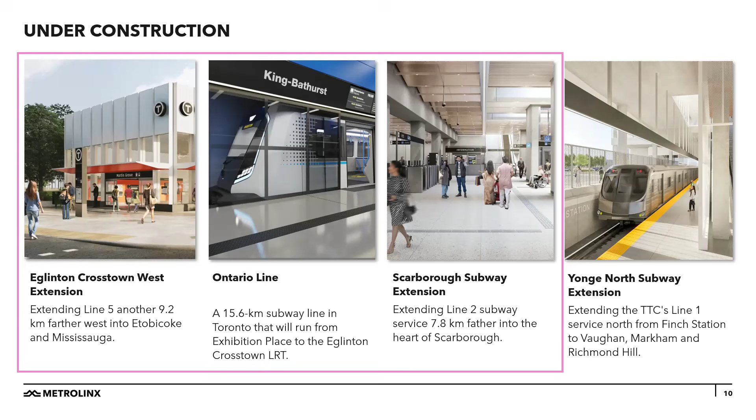So let's turn over first to the Eglinton Crosstown West Extension, the ECWE. I'm not going to read everything on the slide here, but suffice to say we've got 9.2 kilometers of new transit extending further west into Etobicoke and on into Mississauga at Renforth Station, 7 new stations, and a whole multitude of connections to other regional and municipal transit. What I'm always interested in is the service that a new line brings to communities, and the estimates peg this one at bringing higher order transit to 37,500 residents, of which roughly 4,800 are low-income residents.

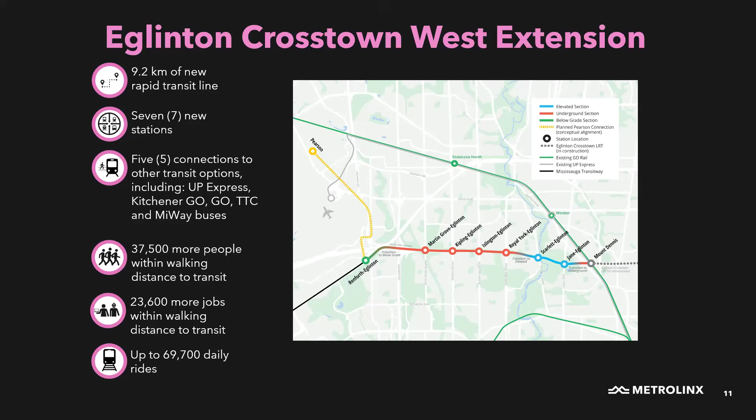Now, this project is being built in 3 broad sections, and I'm going to take you on a little tour, starting in the west and heading east, beginning with the longest section that is tunneled underground, 6.3 kilometers with 2 tunnel boring machines, or TBMs. We'll jump to that in just a moment. Then we'll go above ground to an elevated guideway, or in plain language, a bridge across the Humber River Valley and Eglinton Flats. And then an even shorter tunneled segment, which is the final 500 meters to Mount Dennis Station.

So I promised you that I'd share some of the behind the scenes moments that have really fascinated me since joining Metrolinx 4 years ago. One of those was going inside a tunnel boring machine. Back in summer of 2023, I had that opportunity to go down into the tunnels of the Eglinton Crosstown West Extension and ride, I think it was possibly a couple of kilometers along, in a little people mover contraption. And eventually we ended up at a tunnel boring machine.

I didn't quite know what to expect at the time, but I can tell you these machines are huge — 6.5 meters across and 132 meters long. This part here, we're sort of at the tail end of it, if I recall correctly. And there's a whole sophisticated machinery at the very front that's crunching away at the bedrock, soil, gravel, and everything underground, plus these really interesting automated arms that put concrete tunnel liners, reinforced rings or ring segments, in place as it moves along, which creates the tunnel surface around you. It roughly moves about 10 to 15 meters a day.

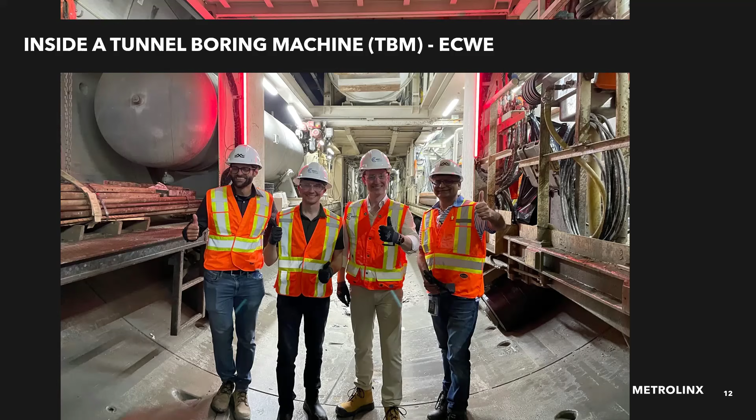This one was about 10 to 15 meters a day. One of the many things I found fascinating, in addition to the sophisticated equipment in there, the computers, the pressure sensors monitoring that keep the soil, shale, and bedrock away from us, was learning that people on shift working in the TBM down the tunnel generally spend their entire shift down there. It's too long to take that little vehicle in and out several kilometers, so they bring their lunch down there. There's a washroom down there too, and that's where they stay over the course of their shift.

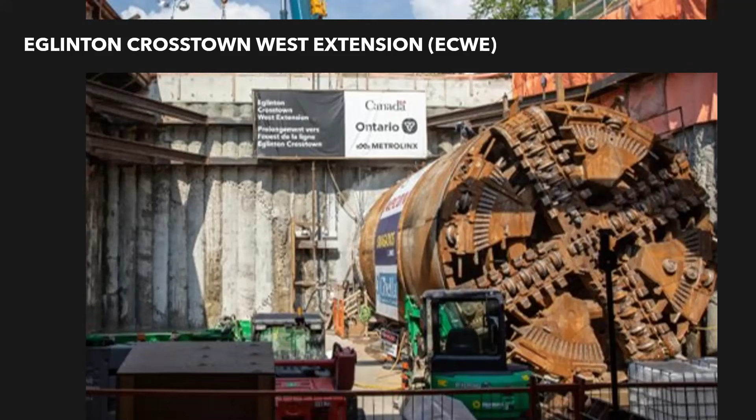This is what a TBM looks like at the end of its journey. This is Rexy, the first of the two tunnel boring machines for the Crosstown West Extension to break through at what we call an extraction shaft. That was in April of 2024. Renny, its sister TBM, broke through about a month later, and then we took apart the machines and pulled them out.

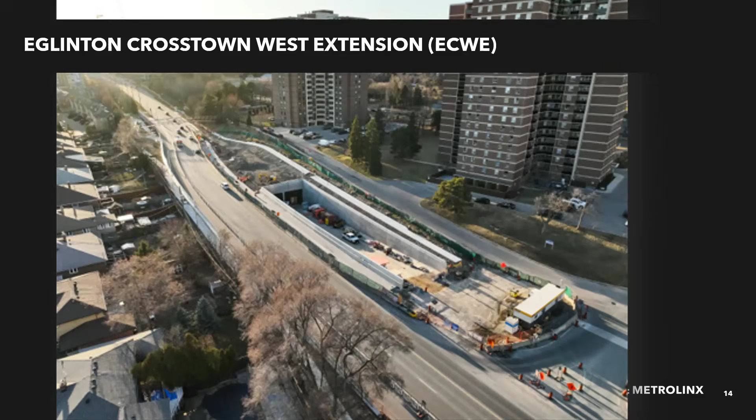Fast forwarding to where we are today, this picture was taken, I imagine, just prior to the winter, but it gives you a sense of what that space looks like now. That's the same spot, but it's continued to be built out and polished, and that will eventually be the portal where trains come in and out of that underground portion. Apologies for the blurriness, blown up to full size - I wasn't able to find the original JPEG, but I thought it was a really interesting picture. For reference, this is at Scarlett Road and Eglinton Avenue West, just west of the Humber River.

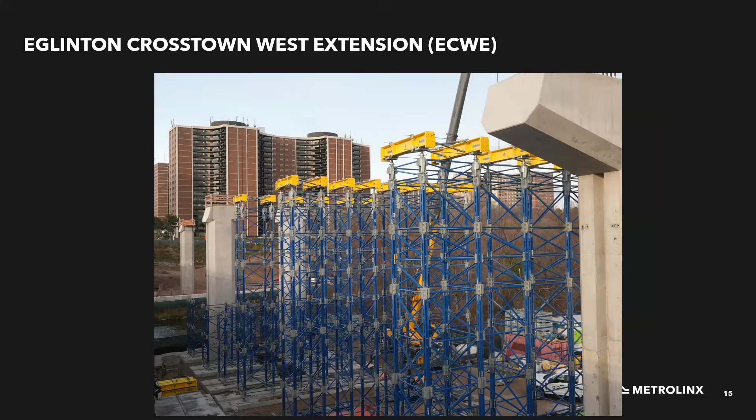I'm going to pause here and we'll switch into a video. It's just under a minute long and it'll describe this elevated guideway.

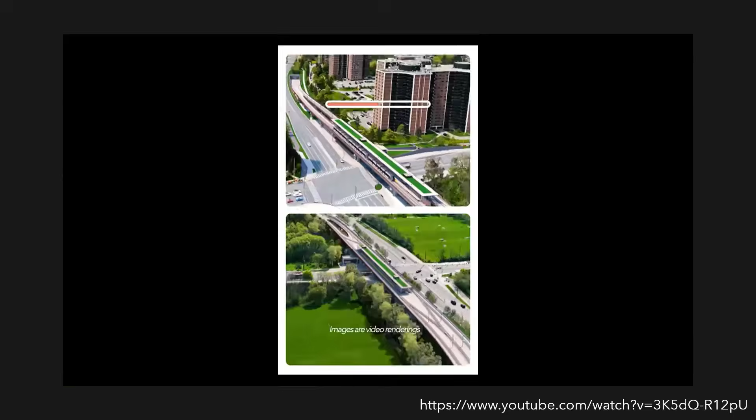Let's take a look at a vital part of the Eglinton Crosstown West Extension, the elevated section. This part of the route will run on a 1.5 kilometer bridge or guideway from just west of Scarlett Road to east of Jane Street. The guideway will run along the north side of Eglinton Avenue West before heading underground again and connecting to the Mount Dennis station. The stations at Scarlett Road and Jane Street will also be elevated. It crosses the Humber River in a floodplain zone. Elevating the line here is the best way to provide safe, reliable, rapid transit to Mount Dennis. Building the elevated guideway is critical to moving forward on the Eglinton Crosstown West Extension. The project will extend the Crosstown LRT another 9.2 kilometers farther west, cutting commute times by up to 22 minutes and reducing annual greenhouse gas emissions by 5,800 tons along the way.

So that's a bit of an explanation of the elevated guideway. I recognize that in the City of Toronto, rail crosses large bridges like TTC Line 2 approaching Old Mill, and our existing subway lines go above ground and somewhat elevated in some spaces, but this is a particularly visible stretch. Maybe another comparison might be the Up Express as it gets closer to the airport. But we know from around the world it's a really viable way of building transit - it's generally faster and less expensive, and it creates beautiful views for those on it, as well as opportunities for placemaking and activations beneath it, depending on the urban fabric or the place where that transit's built.

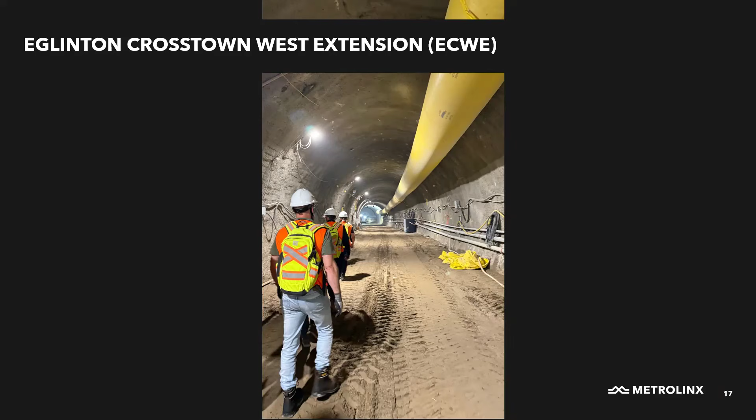So I'll pivot and wrap up on the ECWE before moving over into the Ontario Line. This is another tunnel - I've been lucky enough to go into both tunnels for the ECWE. This is that shorter 500-meter segment, and it's a different look and feel. This one is being built through the sequential excavation method - essentially dug out sort of by hand, by small machines, roadheaders and so on, carving a path through this space, eventually ending up at Mount Dennis Station, where we've already got this excavation pit just in front of the existing station to the south.

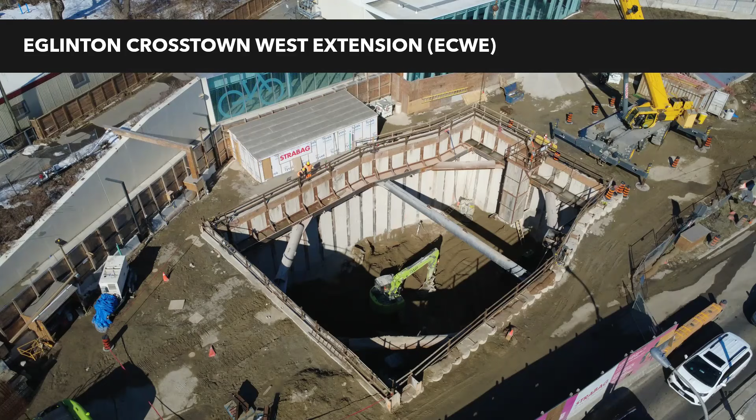So let's swing over to the Ontario line. I'm sure many of you have heard of it. In a previous incarnation, it was known as the Downtown Relief Line. It's been designed to ease crowding on existing transit networks, and in particular, that pinch point at Yonge and Bloor.

I imagine all of us living in the city of Toronto have experienced Yonge and Bloor at rush hour. This project is designed to relieve that, particularly the passenger traffic coming from the eastern end of Line 2, by offering an interchange station at Pape, which allows people to swoop down into the downtown core without continuing further west across to Bloor and then south.

Ultimately, this line is designed to help people get from end to end in about 30 minutes compared to the 70 it takes on transit today. It might be a bit faster now that the Crosstown is up and running, but ultimately this is going to be especially valuable to people living in the northeastern edge of our city.

Thorncliffe Park, Flemingdon Park, and up near the Don Valley, which really until the Crosstown opened was not well served by transit. Certainly lots of bus lines, but it did not have higher order transit to the stations.

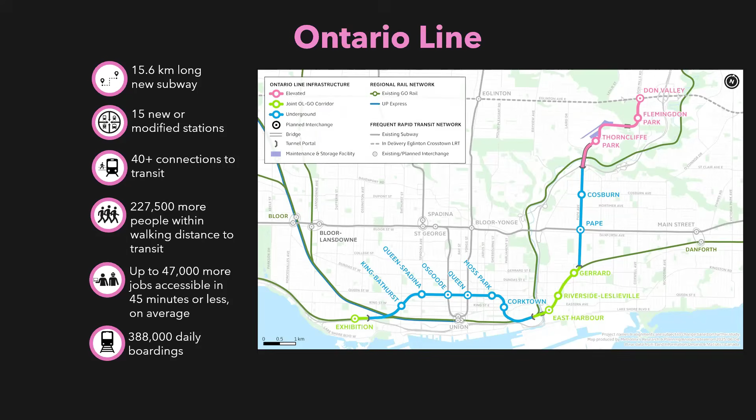I didn't plan on zipping through each and every station because there are so many of them. So to kick off my talk on this project, I'm going to turn to a video filmed with one of my colleagues, Rubab. It gives you a bird's eye view of the project and what to expect in the city of Toronto.

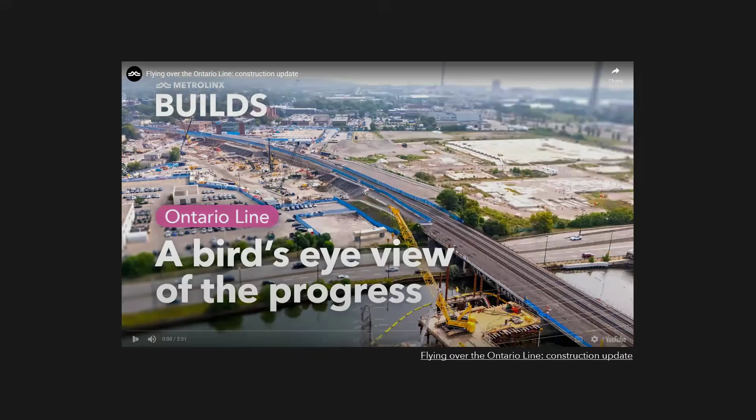The Ontario line is taking shape across Toronto, and we're digging deep on all the details. But first, we need to go high. Really high. From Exhibition Station to the Don Valley, get a bird's eye view of the progress we're making on the Ontario line.

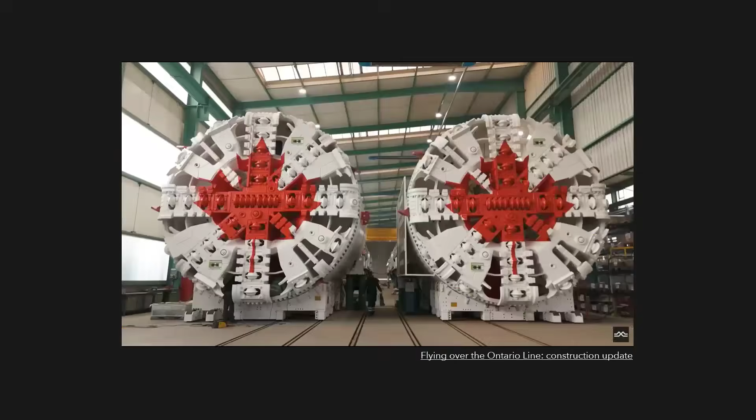At Exhibition, we've completed excavation for the launch shaft that will allow 2 tunnel boring machines to carve out the southern portion of the Ontario line. We're also realigning tracks, building new platforms, and starting work on 2 new station entrances in the area.

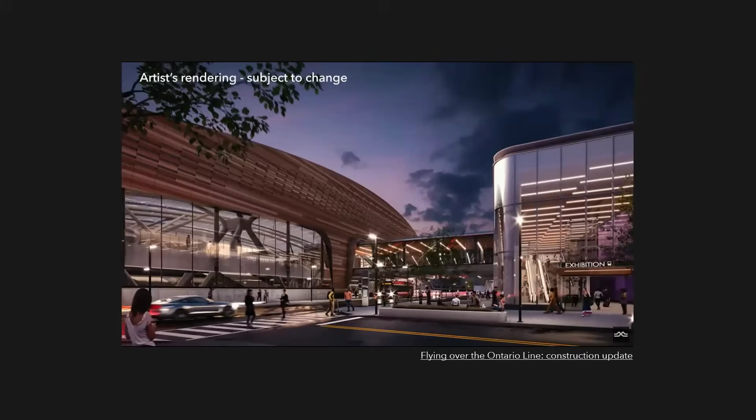Across the downtown core, excavation is complete at Moss Park and currently underway at King Bathurst, Queen Spadina, Queen, and Corktown. And here at the Don Yard, crews are digging out the spot where Ontario line trains will emerge from underground.

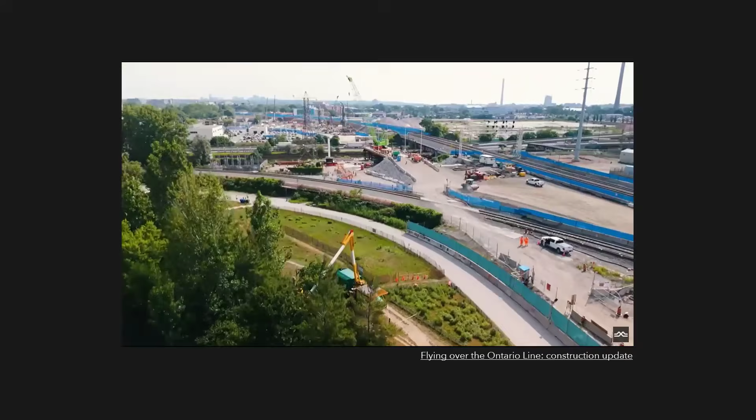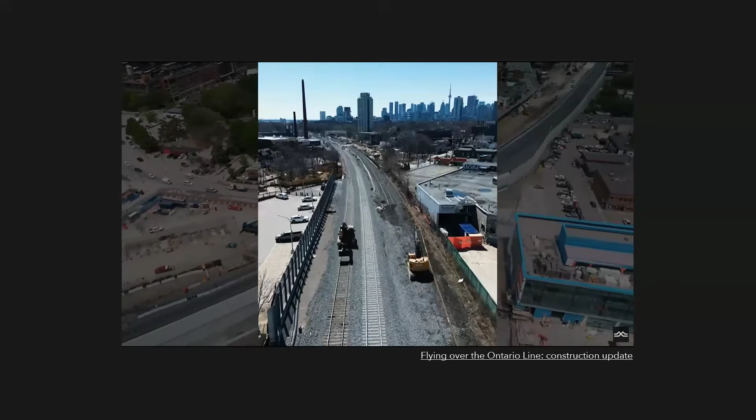Construction is underway on the new Lower Don Bridge, which will carry Ontario line trains across the Don River and the Don Valley Parkway. Just east of the Don River, through Riverside and Leslieville, we've laid down 2 kilometers of new tracks and shifted almost 900 meters of existing track to make room for the Ontario line.

From here, future Ontario line trains will move from the above-ground tracks to underground tunnels below Pape Avenue. We recently broke ground on the tunnel launch shaft, where 2 tunnel boring machines will begin digging out the second underground section of the line.

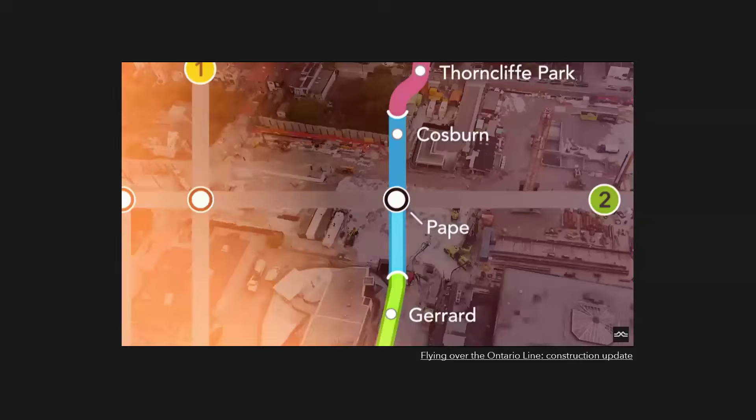Over at Pape and Danforth, where the Ontario line will connect to TTC's Line 2, crews have finished building slurry walls—thick concrete barriers that help keep the site stable during digging. The site is now getting ready for excavation.

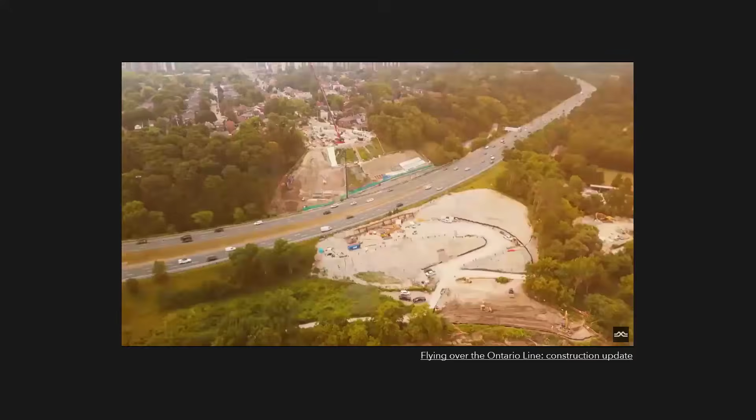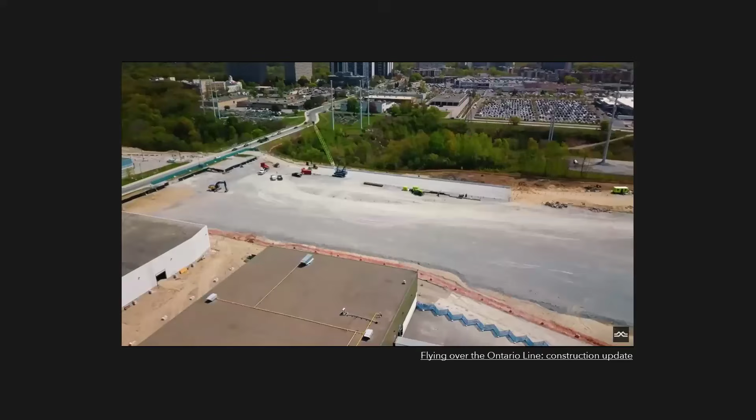Heading north up the Don Valley, work is underway to prepare for the elevated guideways that will carry Ontario line trains across the ravine and connect with Line 5 Eglinton. And here in Thorncliffe Park, we're laying the foundation for the Ontario line's future operations, maintenance, and storage facility, where Ontario line trains will be serviced and stored for daily use.

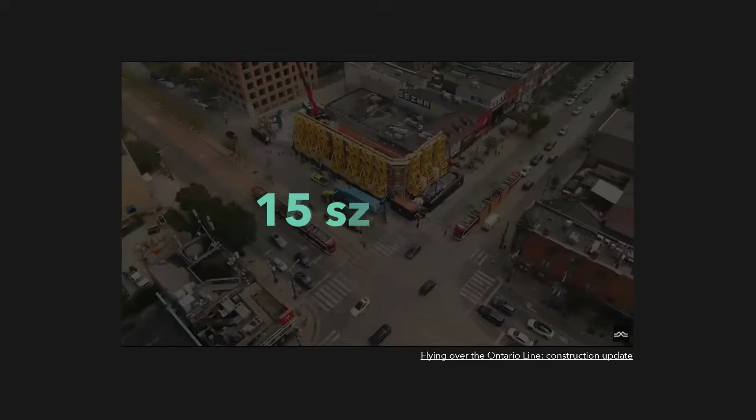When it's all done, the Ontario line will stretch through the heart of downtown Toronto, feature 15 stations, 15.6 kilometers of new subway service, and connect seamlessly with the TTC, GO trains, and Line 5 Eglinton.

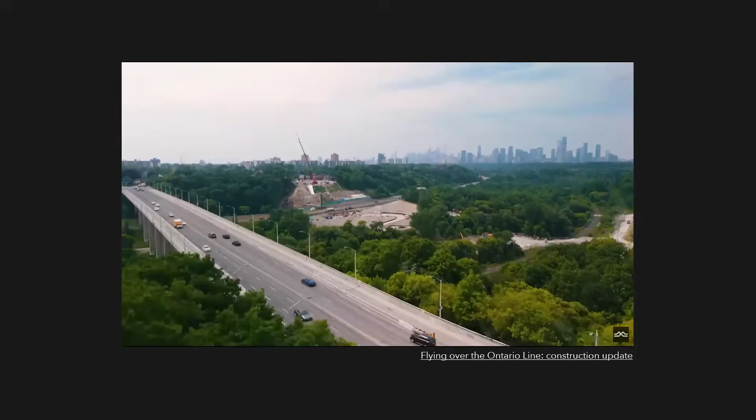Seeing that video gives me hope that summer is on the horizon, although if we listen to the weather forecasts, apparently we're getting snow this weekend. But as you can tell, that video was filmed last summer, so we've made progress since then. Some of the photos reflect where we were when the grass was green and trees had leaves, but it gives you that quick overview of the project.

And now I'm going to hop across just a few of the interesting sites and tell a few interesting stories.

As Rubab mentioned in the video, we have TBMs on this project, and in fact we've got 4 of them. 2 will tunnel from Exhibition Station, pictured here, across the downtown core right through to Corktown in the eastern part of the downtown core. One, named Libby, was lowered underground last month, and her sister Corky is scheduled to arrive later this spring. These are comparable in size to the TBMs on the ECWE, about 7 meters across, and they're going to dig quite deep, 40 meters underground into the Georgian Bay Shale.

There are a couple of reasons for that. It makes tunneling very predictable for the TBM operators, safer and certainly more predictable. But the downtown core also has some very unique features, like buildings, lots of basements and parking structures. We have existing subways, utilities, and sewers. So by going deep, we can avoid those.

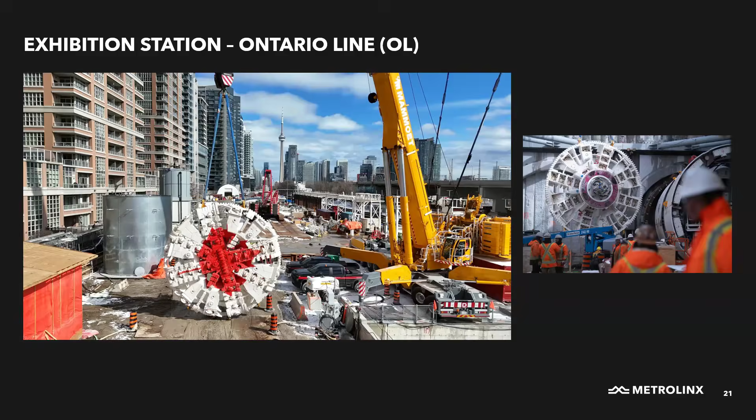We've already dug deep underground at both sites, and now we're digging a tunnel from the south end to the north end using that type of tunneling I mentioned earlier called SEM, or sequential excavation method, digging layer by layer and digging out the tunnel.

As they go along, they do something called shotcrete, and they reinforce the tunnel, and then ultimately that's where the trains will run. But first the TBMs will pass through that area to carve out some specific tunnels. That's all happening underground 24/7, so 24 hours a day, 7 days a week, with expected completion later this spring.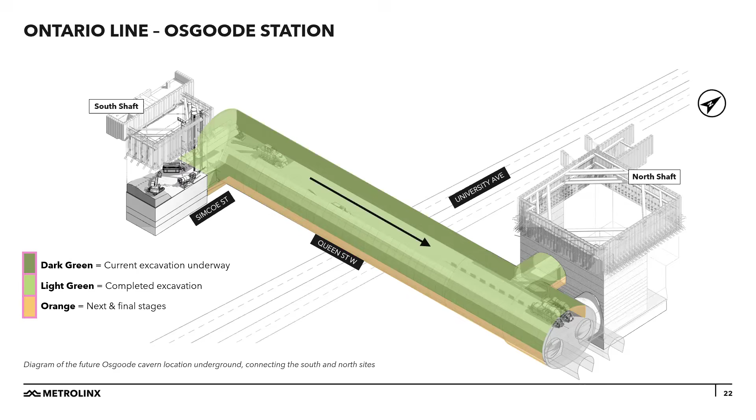Speaking of Osgoode Station, I wanted to talk a bit about something you're probably seeing above ground at both sites, and you may not have seen this picture. If you've been through the downtown core recently, you've probably seen some giant white structures. They almost look like wedding tents, but we've got a couple at the Osgoode site, one at Simcoe, one at Queen and University. We've got another one over at Yonge and Queen, and we're building a movable one at Exhibition.

What those are called is acoustic sheds, and as you might imagine, they're designed to reduce the noise from construction. They also help protect the construction site, including staff, from the elements. And when you combine both of those, that allows us to put more hours in with less disruption to people living and working around them.

But they're also not just about noise, they're also quite functional. Those white supports, those struts crossing across the top of the image there, are actually crane supports for a gantry crane, used to lift materials in and out of the excavation pit.

We choose these sites based on suitability. We need to be able to dig down into the bedrock to install the crane and its supports, so you need a big enough site for that. And then the site needs to have enough ongoing work that's likely to be noisy and disruptive that it warrants the effort and the cost of building a shed. So that's why in some cases you don't see them on some sites.

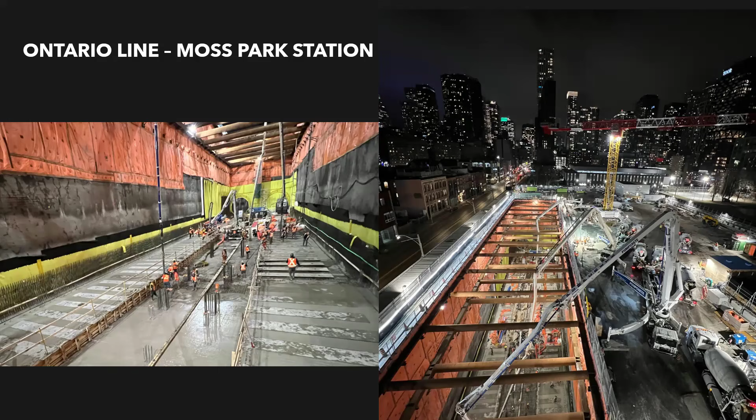Well, 7,300 cubic meters of poured concrete. Let's just say that's a lot. 950 tons of rebar were installed. Our good friends at Microsoft Copilot tell us that's about the equivalent of about 158 adult African elephants. I'll take their word for it. I've corroborated it elsewhere, but that's a whole lot of rebar, and we're just getting started.

And 812 cement truck deliveries. Through that entire process, we supported the local neighborhood. We did not receive any complaints or concerns about noise, traffic, or disruption in that neighborhood during this concrete pour process.

Moving right along, the Ontario line continues east into Leslieville, Riverside, and eventually moves above ground into a place we now call the Joint Corridor. We call it a joint corridor because we are building out additional tracks so the Ontario line can run jointly alongside the GO trains.

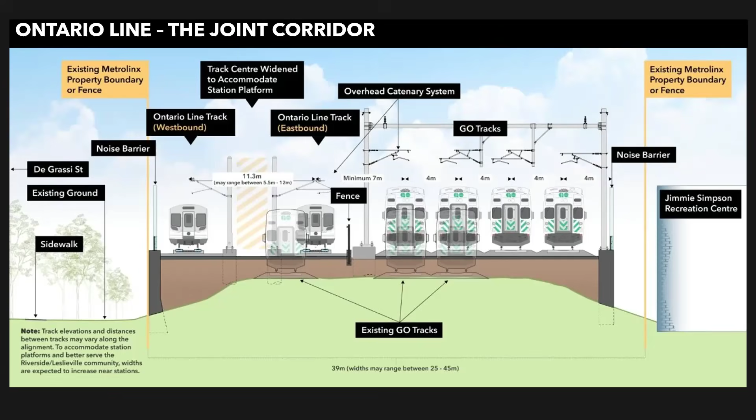And I will add that new noise barriers are already installed and being installed that will make it a quieter corridor than it is today with existing GO trains.

Moving right along, we're going to take a big jump now to north of Bloor Street and beyond. In the northern stretch of the project, excavation is well underway at a number of our stations.

We're in the process of digging out beneath Pape Station, which will be an interchange station on the new line, reinforcing the existing subway tunnels and preparing to build beneath it.

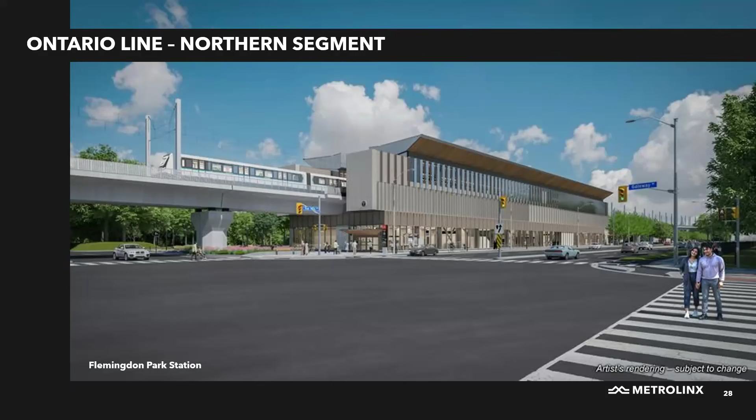I didn't show it, but I did mention that lower Don Bridge. There's video footage of it on the web moving into place over the course of a weekend not too long ago. Continuing to the north, we have Flemingdon Park Station here, and ground's been broken at this station, Thorncliffe Park Station, the Don Valley Station, and Cosburn Station, as well as the elevated guideway and track that's going to take the trains between these 3 stations.

And speaking of the trains, I'd be remiss if I didn't speak to the rolling stock when I'm at a Railway Museum event. I won't dwell on this - I know for all the rolling stock fans in the audience tonight, this will be an old rendering you've seen before. The reason we don't have something new is because we're in the midst of working through the design process with our contractor, Connect 6.

The trains are going to have quite a few unique features, including the fact that they'll be driverless. In order to make that work, the new system is going to use platform doors, which is really a first in the city for a subway. The only place we have an equivalent right now is at the Up Express at Union Station. The intent is that the doors keep people, belongings, and debris off of the tracks, which, as we know from the TTC, can be a major cause of reliability issues with the existing subways.

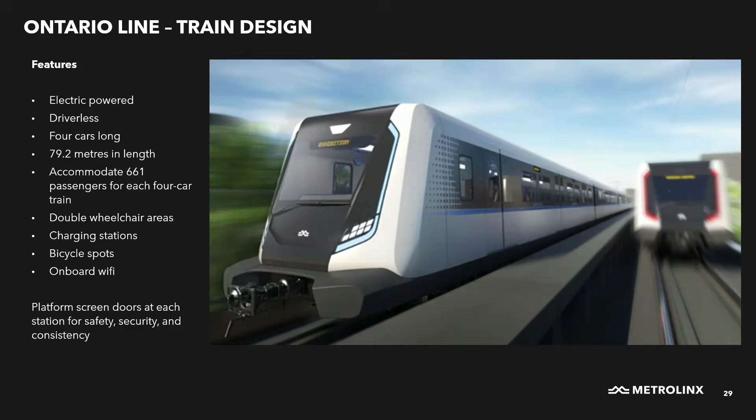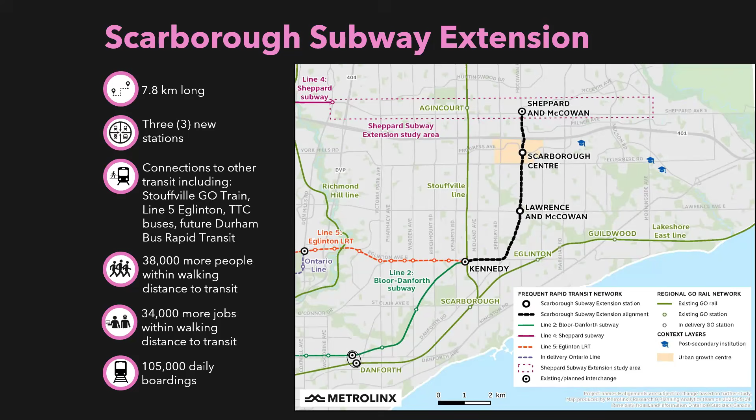Why don't we wrap up by switching over to the Scarborough Subway Extension - 7.8 kilometers long, 3 new stations, bringing higher order transit to the Scarborough Health Network General Campus, as well as reconnecting the Scarborough Town Centre to higher order transit. This project is bringing, again, tens of thousands of people within walking distance of transit. It is a big year for SSE.

Tunneling is over halfway done, as was announced at our Metrolinx board meeting last month. We are using the largest TBM ever used on a project in Canada. It's 11 meters wide, taller than two giraffes, about as long as three GO train cars. And that's compared to TBMs about 6 meters wide for the Ontario line and ECWE.

The TBM, as I said, is over halfway done, tunneling and heading south towards the Lawrence and McCowan Station, reaching a peak depth of 35 meters.

Speaking of stations, it's a big year for excavation on the Scarborough Subway Extension. Here we've got Kennedy Station, where we're building out the station to connect to the eventual extension. Beyond excavation, I'm really looking forward to hopefully next month, we'll be installing artwork on the construction hoarding that was put together by a youth art program done in partnership with the Don Montgomery Community Recreation Center - just one of the neat things we're able to do with communities across the city and the region.

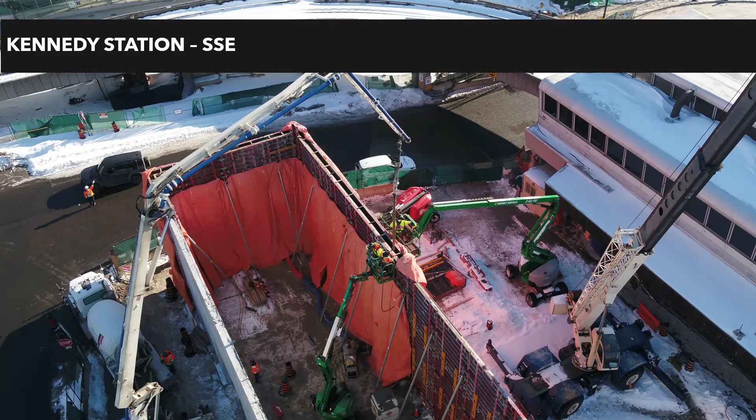Before I leave Scarborough, I want to recognize everyone that took part in our consultations about the interior design of stations. We had wanted to find ways to make the color schemes and the walls and tiling and patterns reflect Scarborough and what makes Scarborough unique. So we asked residents to tell us what are you proud of about Scarborough, and we heard about diversity, nature, food and history through 2 rounds of consultations. Now our designers are building that into the design scheme for each of the stations.

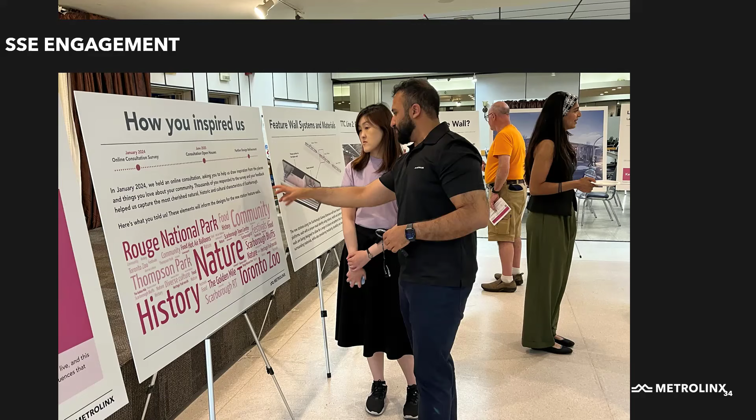And before I leave Scarborough Subway Extension, I do want to put a shout out - if any of you live in Scarborough and are interested in volunteering, we plan to be launching the Construction Liaison Committee for the project a little later this year. I'd encourage you to subscribe to our newsletter, through which we'll do an expression of interest and a call out for volunteers.

Ryan and Alex, I know I'm coming up on time, so I'm going to conclude with a couple moments speaking to community engagement. Again, I'm a community engagement director, so this is my bread and butter. Ultimately, our efforts are fourfold as it relates to construction projects.

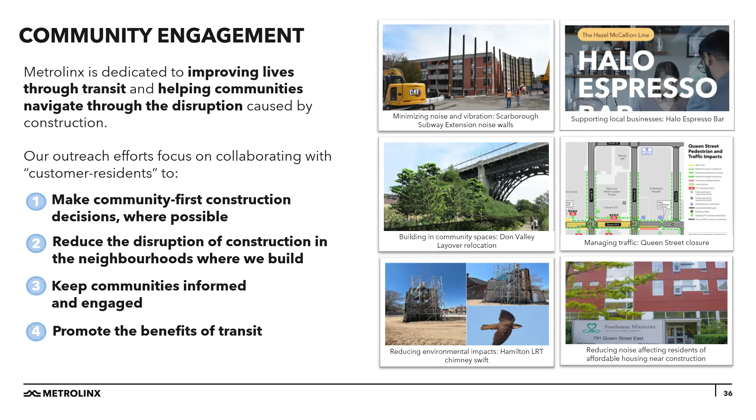We try to put the community first and bring community-first construction decisions to projects where possible. We do that, as I mentioned earlier, by sitting in on those construction planning meetings, looking at those project plans, trying to anticipate how people and communities will respond to and react to what's happening. We strive to reduce the disruption of construction, keep communities engaged, and certainly promote the benefits of transit.

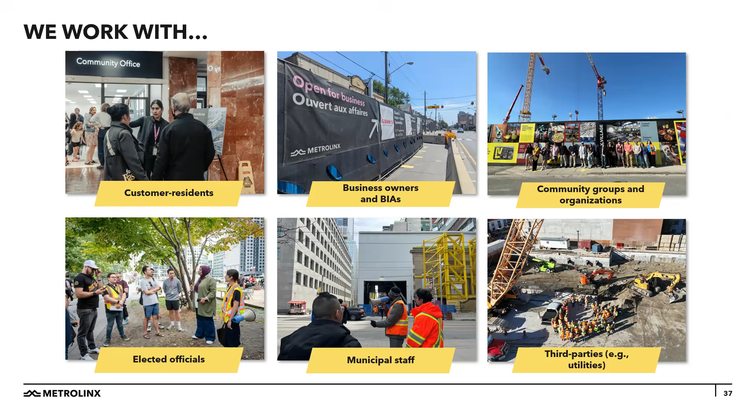We do that with a whole range of people across the city: customers, residents, business owners, BIAs, community groups, elected officials at all 3 levels of government. We work with municipal staff for the City of Toronto each and every day, as well as utility providers like Toronto Hydro, Bell, and others.

And my last 2 slides here as we come in for a landing at 7:46. Broadly speaking, there are 2 main goals for community engagement at Metrolinx, and I recognize this isn't something we talk about that often, but the first is construction mitigation.

So again, reducing impacts. Here I would just say the principle is an ounce of prevention is worth a pound of cure. So we try to spot anything that's going to be noisy, dirty, cause vibrations, or take place overnight. Or maybe it's happening near a school, a senior's home, a hospital, or a residential area. We take that back to the construction team and we'll say, well, you're doing something near a school. Have you thought about pickup and drop-off time? How are you going to keep the kids safe? What about noise? What about dust in the schoolyard?

And we challenge construction teams, and we in turn are challenged by community members, and I'm grateful for that. We facilitate 15 local construction liaison committees across those projects I've described, the 3 under construction. The intent there is that community members can tell us about their communities, what's important to them, how they move around, and how construction might impact them. So ideally, we're reducing that likelihood.

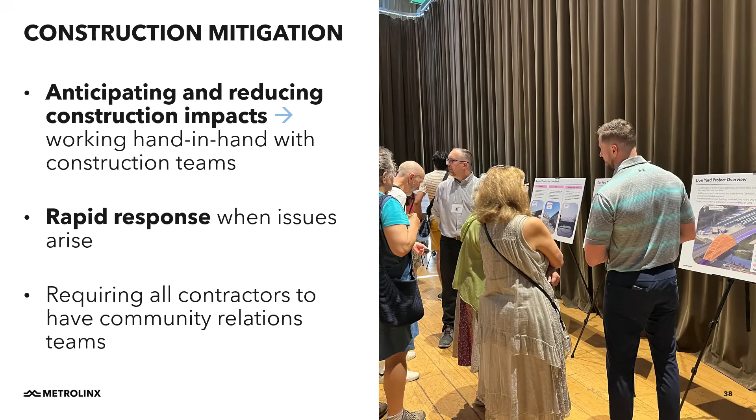And we're not in it alone. We require the same from our contractors, this mentality, and we increasingly force them to take steps to protect communities and reduce impacts in communities.

I'll wrap it up right here just to say that if our mitigation teams focus on the day to day, our strategic engagement staff members keep their eye on the horizon. And I think this is just perfect for a group this evening of transit fans and railway fans. The strategy team is able to lift themselves up out of the day-to-day fray of construction and build partnerships in our communities. They do things like host tours of construction sites, tree giveaways, park cleanups, and the art that I mentioned before.

Just last year we organized 2 Ontario Line Jane's Walk tours. Just one example: we had somebody drive 5 hours from Ottawa to take part in a tour on the Saturday. He spent the night, and then he did the other tour we offered the next day. I thought it was a powerful moment in transit enthusiasm and railway enthusiasm.

When you're up to your elbows in construction delivery, as I often am, you can forget about the bigger picture and what we're all a part of here in the city of Toronto. Truly, this transit build is going to change the face of this city for generations. And what an incredible time to be living here.

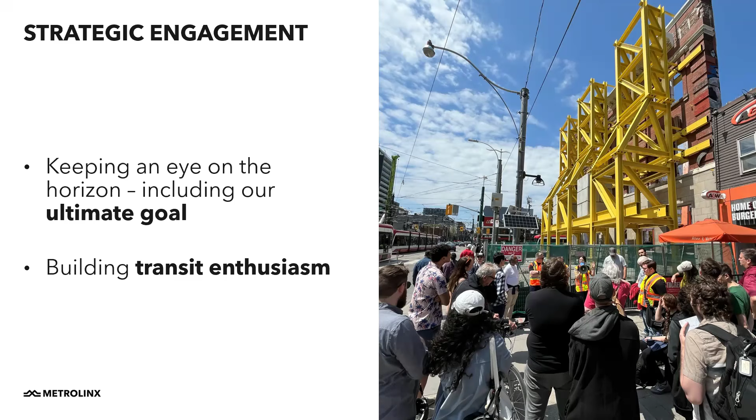So Alex, Ryan, with that I'll wrap it up. I know we've got probably just under 10 minutes, and a bunch of questions are probably rolling in. Haven't had a chance to look at them all yet, but I'll turn it over to you to help moderate them. I will say, again, my specialty is not GO transit, and it's not projects outside the city of Toronto. It really is those 3 construction projects being built in the city of Toronto right now. So for questions about other topics, I would probably struggle to answer them, but I'd be pleased to bring in some of my colleagues to speak at a future event. Maybe we could bring in a couple to talk about everything in the 905 area code, and happy to bring in experts to talk about technical design details and so on, if that's of interest. Okay Alex, I'm done, back to you.

Thank you, Darren. Very informative talk, very interesting. Of course, something that I think impacts the lives of most of us in this audience. We appreciate you doing this. I especially appreciated some of the up-to-date images with the TBMs. I love the paint jobs, and just seeing some of the work that's being done, I think, as recently as a couple weeks ago. So thank you for sharing that.